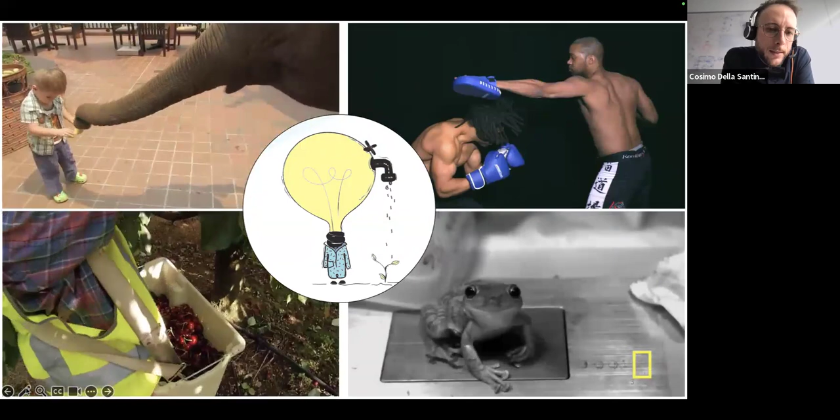But things change when we consider more complex situations, or more precisely, more different kinds of movements. In these cases, we find that animals still largely outperform robots in performing tasks, in performing motions. You can see here a few examples of that.

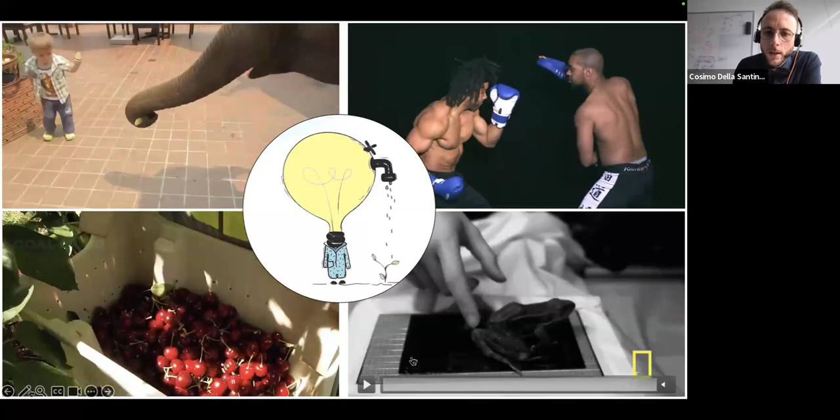Animals can perform movements that are inherently safe, that are simultaneously precise and compliant. They can be robust to external uncertainties and work in very complex tasks like this harvesting task, and they can generate peak performance far beyond the limits that our muscles would let us suspect.

So I want to build this talk upon what may be seen as a bold statement by some, or quite an established statement by others: that a large part of this motor intelligence is generated, or can be generated, by looking at the musculoskeletal dynamics—as produced by the body—rather than some explicit computation that goes on in the brain. Again, this is a bold statement for some of us, and at the same time it's maybe not super clear what this means.

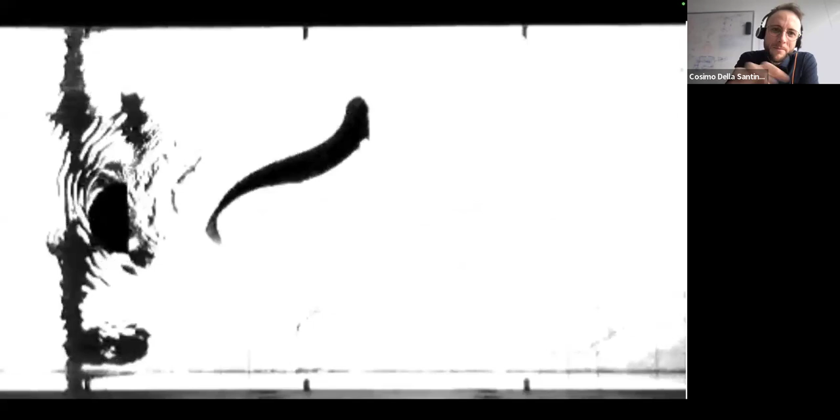So to make it a bit more clear, I have a nice video from research now almost 20 years old. Many of you may already have seen this, but if you have not, I urge you to look at it closely.

The first time that I saw this video, I saw a fish swimming in water, trying to do these very complex motions to stay more or less in the same position, sustaining this continuous, complex flow, because you have this object here creating all kinds of turbulence on this side.

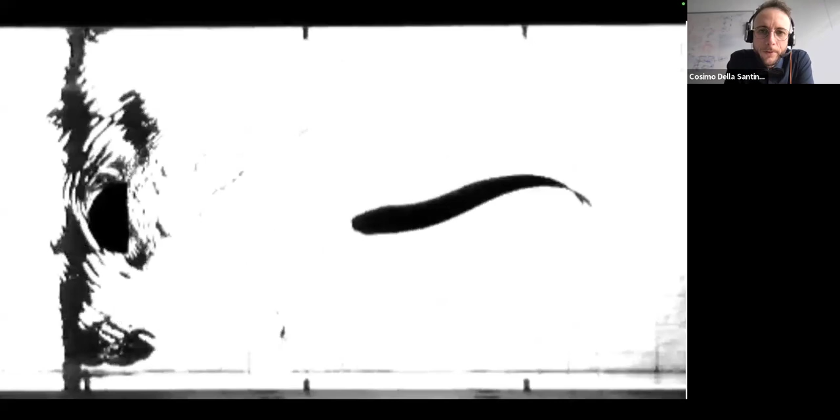After a while, at least I think you start seeing something a bit weird on this fish, but it still looks normal enough. And then only after you read the paper, you discover this is actually a dead fish.

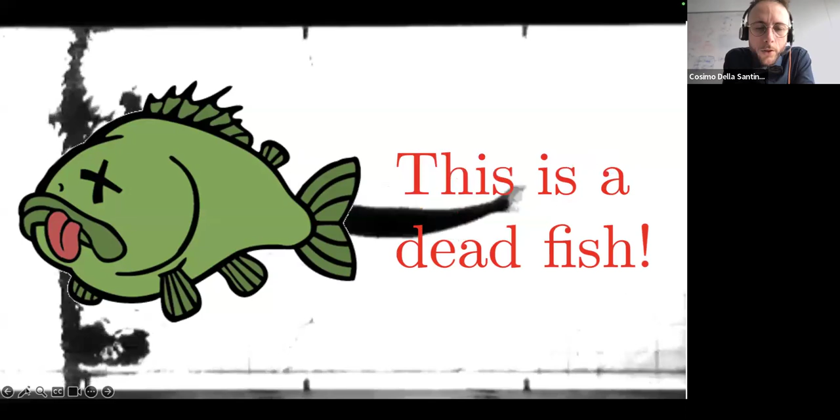And all these complex motions that you see here that allow the fish to stay where it is, more or less, which is what most fishes in rivers have to do for most of the day, is actually not generated by the brain or any computation in the brain of the fish, but it's just a passive property of the interplay between the mechanics of the fish and the fluid. There are many other examples in nature.

Let's start from the first. I think that these dead fish examples, as many others, bring us an important question for robotics, which is: can we build systems that are smart without a brain?

So another way to put it is, can we go from the dead fish in nature to some kind of zombie robot? And by zombie robot, I mean a robot that can move without computation, move intelligently. And in order to do so, I guess it makes sense, since natural bodies can do that, to try to replicate or rely on some of the ingredients we can find in nature.

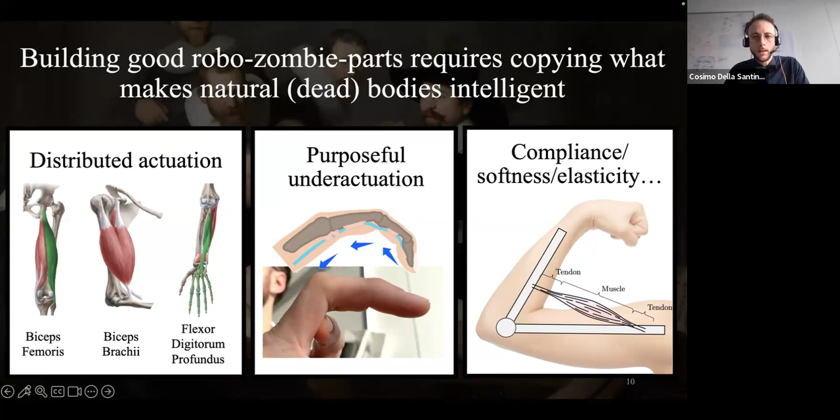Instead of going very much into detail on what all these three mean, let me show it with an example, so how you can transfer them into a system. And this is a work that we did, now, several years ago.

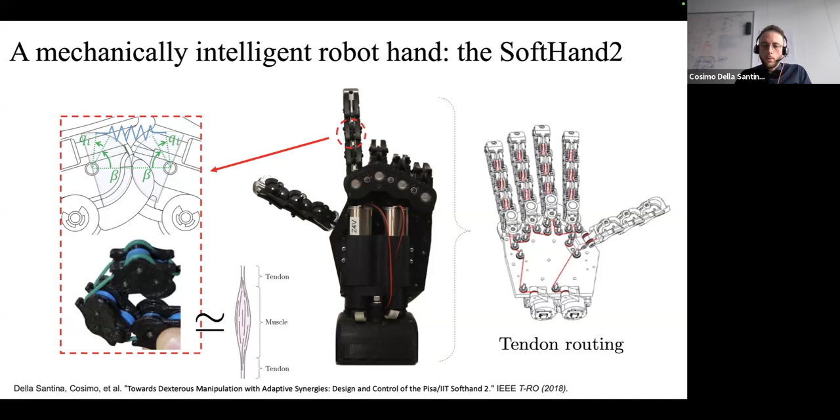And in order to decide which kind of movements should be generated by the motion of the motors, we performed a statistical characterization of human motions, and we translated the most common ways for the hand to close via some modeling of the mechanics. But what's important is that in the end we can tune the mechanical properties so that it could produce any linear combination of these movements.

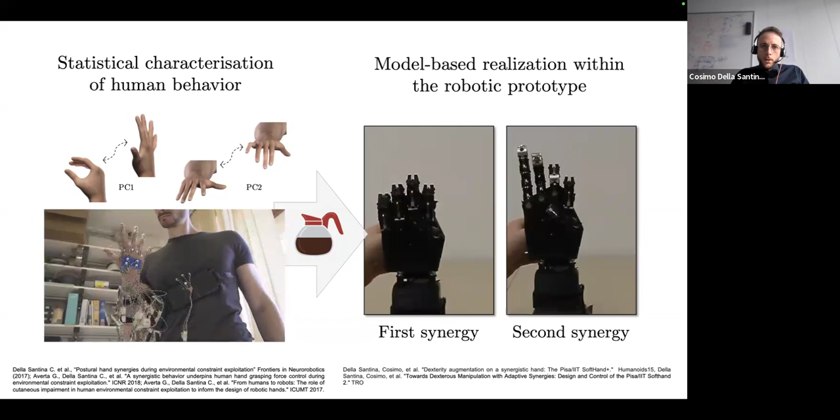So where the physical intelligence comes into play is when some interaction with the environment happens. And this very simple opening and closing behavior that you can see in the black box on the right ends up generating a very different final configuration, like something like this, or like something like this in the end, depending on the fact that you have an object and how the object is positioned. And these behaviors are completely an emergent property of the interaction between the hand and the object itself.

There is no sensor, no closed loop, at least no computational closed loop. It's all generated as a response of the same feed-forward action.

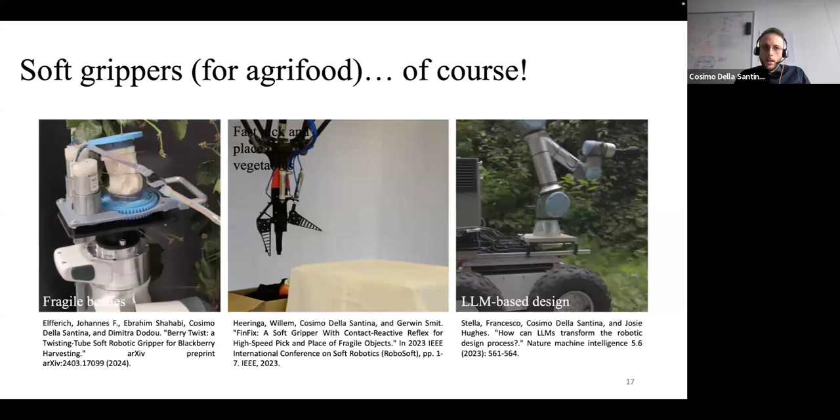And for people among you who know about soft grippers or under-actuated grippers, this is no surprise. Indeed, these are just three other examples of works that we have done a bit more recently in my group, and now we are looking more at applications in agriculture, and we are not the only ones—a lot of people are looking into that. But this idea of just doing a 0-1 input to a gripper, and then the mechanics of the gripper will take care of things, is something which is very popular. We definitely did not invent it with that hand.

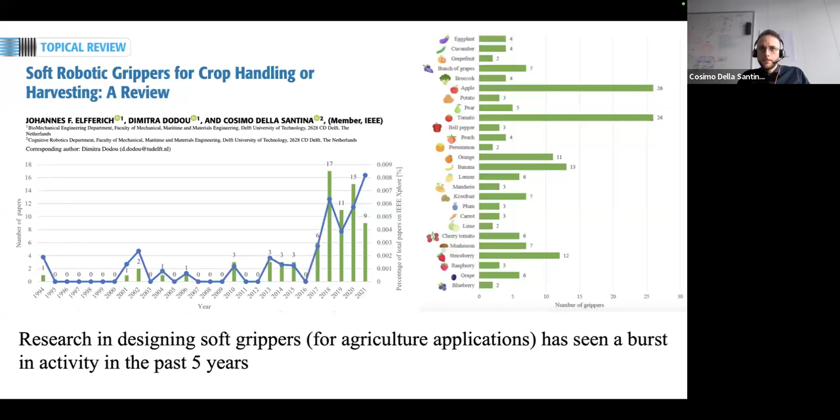But what I was personally struck about when performing this research was instead the capability of the same hand to perform brainless in-hand manipulation, again as a response of the same feed-forward action, which I will show in a second.

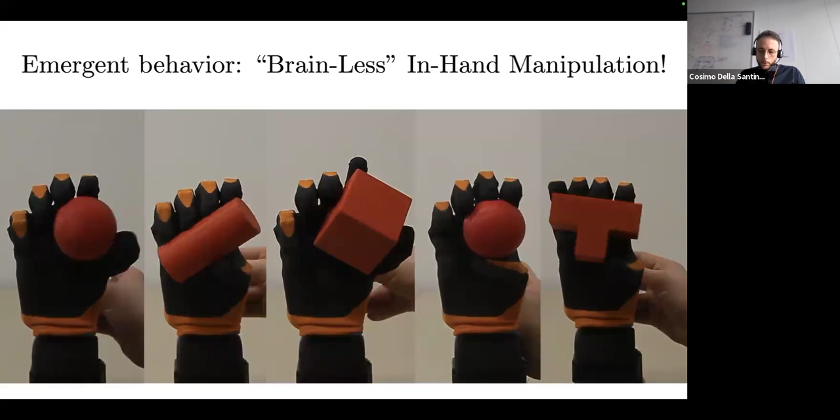And in all these cases, the input is the same, and then you get some very complex pattern of finger movements, and the object is rotated just as a reaction of the mechanics of the system.

And this, I would say, is some physical intelligence in play. A way to realize that is if you compare how you'd need to do the same task with a complex robotic hand, you'd end up having to do quite a lot of complex things, like in this very nice work where they use reinforcement learning with full knowledge of object posture and a lot of sensors. And this is the feed-forward input that we generate every time.

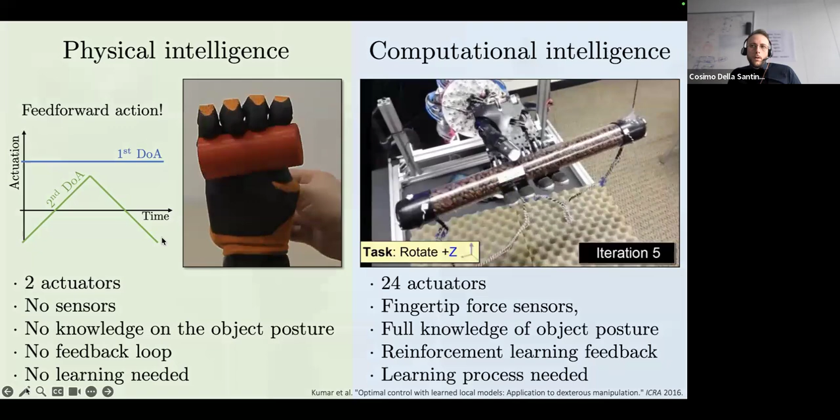At some point, we said, okay, hands are cool. We developed over the years several other kinds of mechanically intelligent hands able to do several things, some grippers, some of them I've shown. But why focus only on hands? What about more complex stuff?

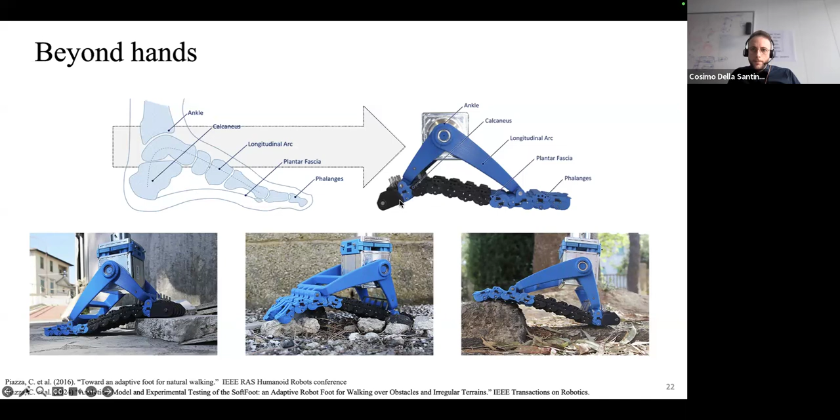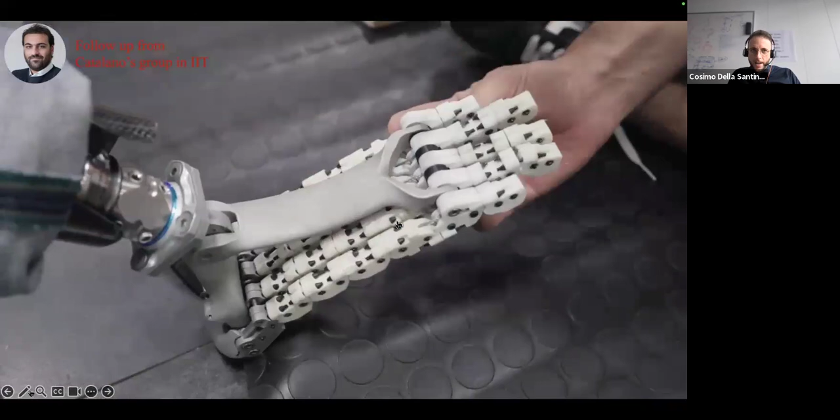And this is why we started to look into feet. I will not talk in detail about this robotic foot, but it's based on very similar ideas and similar technology. Instead I will show you a video from a follow-up research which I'm not involved in, but is so nice. I think it shows very much what this foot is capable of.

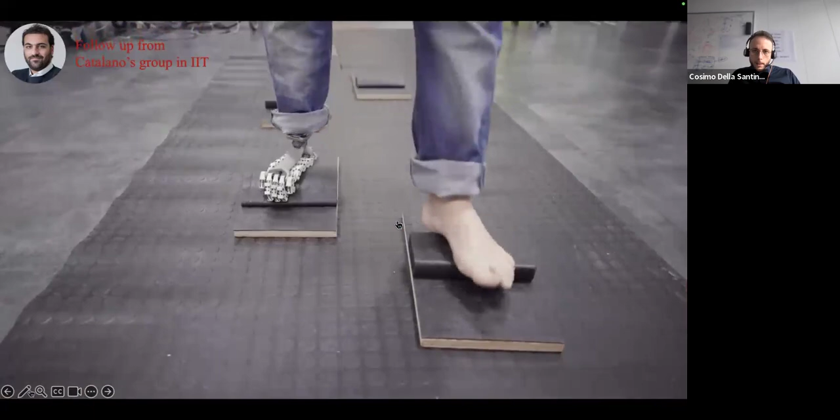So this is work of Manuel Catalano, who was also spearheading the research in the other work. What he did here is extend and basically transform the robotic foot into a prosthesis. But the principle again is the same.

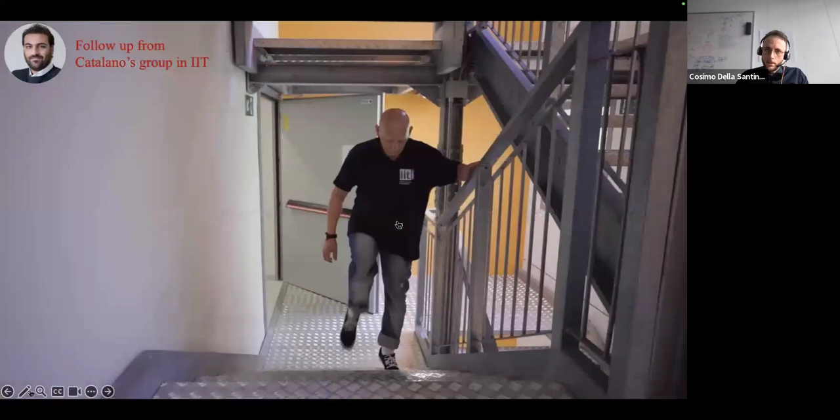So what you can see here are all these kinds of movements, especially the one you probably saw at the beginning, which are like grasping motions completely produced passively by the mechanics of the system. In our robotics papers, we have shown that this dramatically increases the region of stability on uneven terrain for an inverted pendulum compared to a flat foot. So completely by mechanical properties.

More recently, and this is really ongoing work, the paper is in press right now, we have thought of pushing this idea even a step further by building fully passive, fully mechanically intelligent bodies. Here we use similar ideas, this time taking data from dogs running.

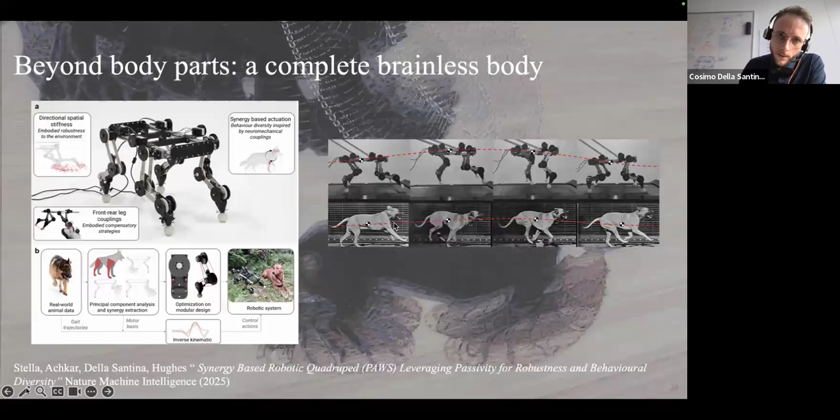You can see some snapshots of the data set here, and this is the system that came up. Again, let's look at a video which probably better shows these ideas that are going on.

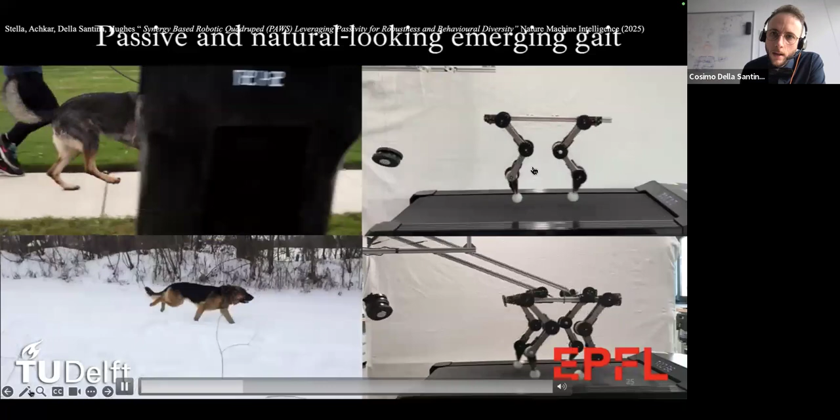So what you have here is a completely passive walker. In the paper we also show an actuated version of this, but what you have in this video is a completely passive walker, which has multiple degrees of freedom and can generate a variety of different patterns. For example, it can adapt by generating various limit cycles for different velocities.

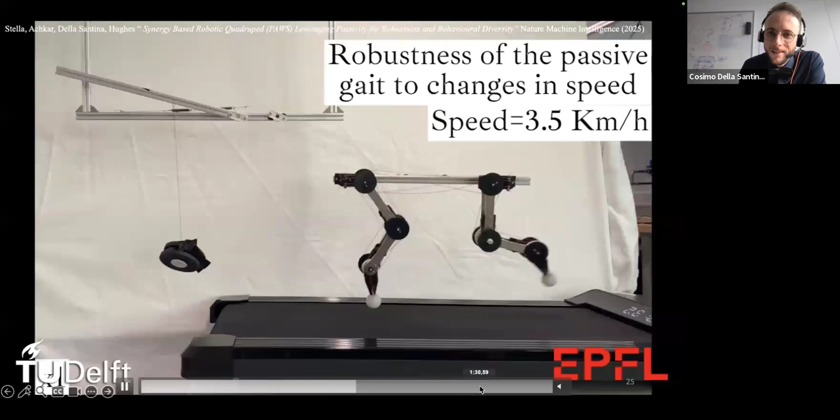So in a sense, we succeed. Many other people are also succeeding in doing this, in generating zombie body parts or zombie bodies, meaning a mechanical system that can already solve part of the motor intelligent tasks on a purely mechanical level.

And of course, I've shown this as if it were a result of some magic, but clearly it's not always fully understood. There are sort of control loops, or at least how I like to think about them, going on in these mechanical systems. They are just implemented mechanically instead of computationally, but this simplifies things a lot, and I believe it's quite worth pushing to keep building more and more intelligent mechanical systems.

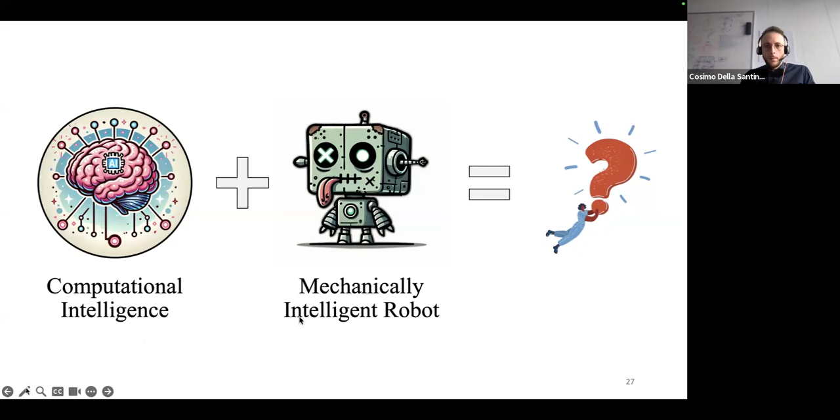However, now that you have a mechanically intelligent robot, you may ask yourself, how do I use it? Unless you work in prosthetics, as for example the video of the foot that you have seen, it doesn't make much sense to take this extreme stance of having no intelligence at all. Actually, the larger part of my group's research focuses on this topic: how you put back some computational intelligence into the mix, but without losing the mechanical intelligence of the robot.

This brings me to the second part of the talk. We do that in several contexts. Let me go back here, but mostly, and this is what I'm going to show today, in grasping, in locomotion, and in continuum soft robots, like soft manipulators.

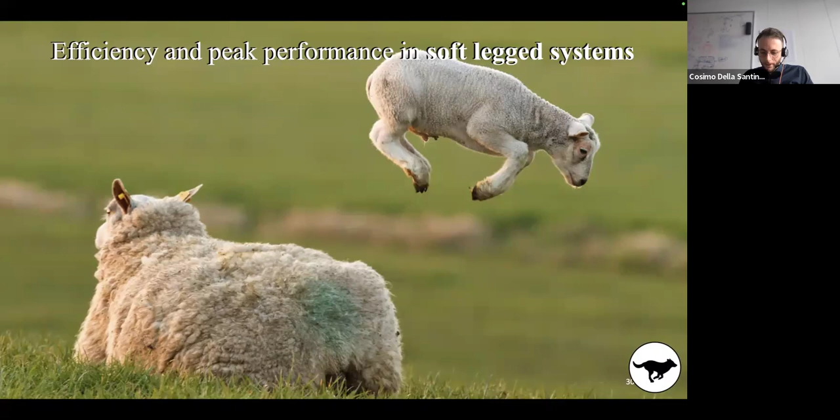With quadrupeds, we look into elastic, or soft, or articulated soft quadrupeds, and we look at periodic locomotion, meaning steady state behaviors. What we want to do here is to exploit elasticity. So here you have tendons and springs hidden into the mechanics of these systems. You want to exploit them in order to generate this super efficient locomotion pattern that allows the robots to walk for a very long time, spending a very reduced amount of energy.

For example, here we have this quadruped that we developed at DLR. It hides into its mechanics springs, and we are able to exploit these springs to walk for several hours on this treadmill in a completely semi-passive way. But this time we have motors, so we can control the behavior. We conceptualize this periodic locomotion challenge as exciting, by means of feedback control loops, nonlinear oscillations, or families of nonlinear oscillations that are embedded in or generated by the multi-body dynamics of this system, or this interplay of this multi-body dynamics with elasticity, with potential forces.

We are also looking at explosive jumps, and I think this is probably the topic most directly related here, because we look at either model-based or model-free optimization. The goal is to generate explosive jumps similar to the frog at the beginning of the talk, by finding ways of injecting energy into the springs and then releasing it all together.

This is a Go 1 robot from Unitree, but we end up opening it up and modifying all kinds of mechanical parts, and also adding some on top, so to have parallel elastic elements in parallel to all joints. So we can store energy in these parallel elastic elements and then release it in order to perform these jumps. But of course, it's quite complex with so many degrees of freedom.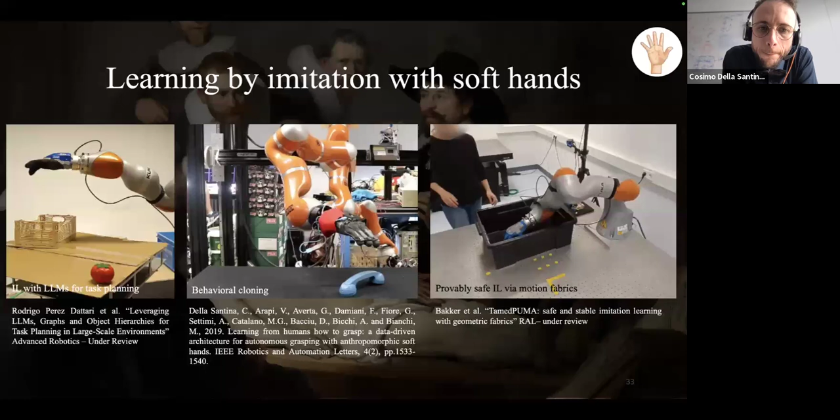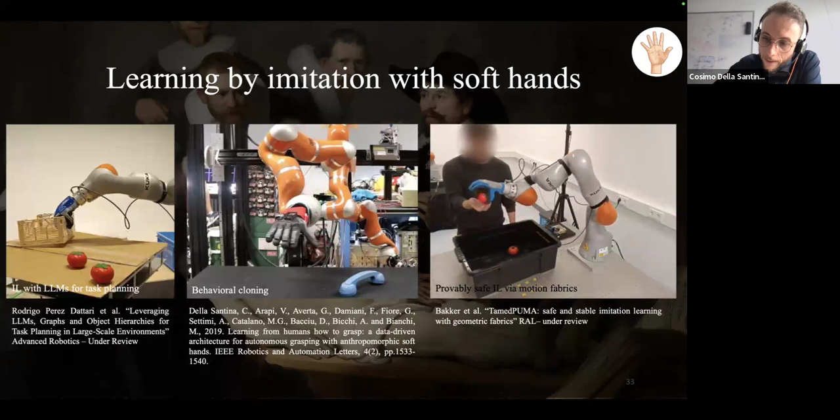The second topic which we focus on, but I will present only briefly with this slide, is to understand how we can use mechanical intelligence, robotic hands, to do grasping and even manipulation. Most of our work here focuses on learning from humans, using AI, especially imitation learning, to copy human behavior and perform these intelligent motions. The focus here is often to do that from very small datasets, even for just one single demonstration, for example. This is made possible by a combination of innovation on the imitation learning side, but also the intelligence that is already embedded in the mechanics.

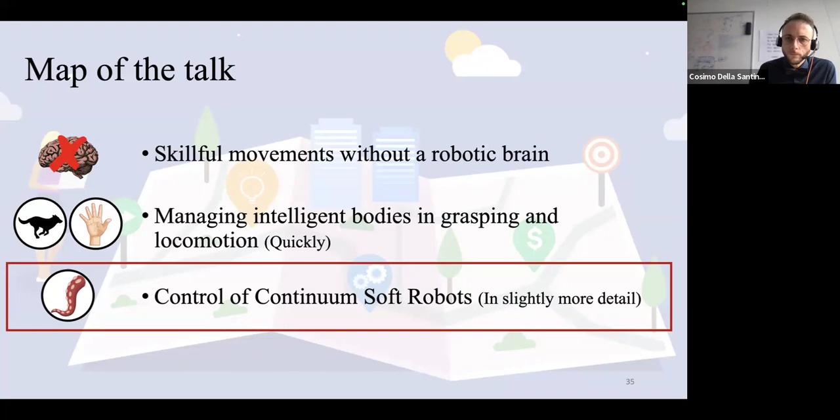Let's move to the third part of the talk, which is on control of continuum soft robots. And with this, I will present in slightly more detail what we mean with continuum soft robots. The term soft robot itself is, I think, a super poorly defined one, and that's why I like to talk about unconventional robots more generally. But the way which I like to define it is any kind of robot where you are embedding purposefully designed compliant elements into the structure.

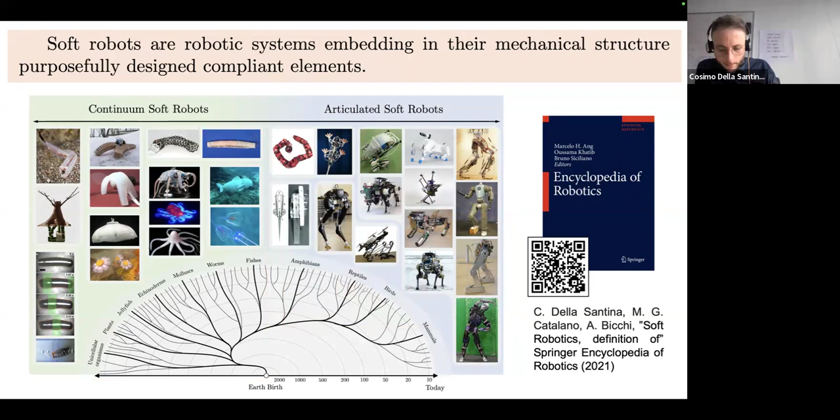So not just continuum soft robots, but also some of the robots that I've shown before. Any kind of robot that follows the third ingredient, the natural ingredient, the fact that in animals we have softness and elasticity. But continuum soft robots are nowadays what most people refer to if you just talk about soft robotics without any adjective before. These are inspired by invertebrate animals like an octopus, and they have this very complex structure. Plenty of work has been done in the past decades, but especially the past 15 years there has been a revival and an explosion of interest in this kind of system.

You can see some of them here. So you have all kinds of robotic platforms around. We developed some ourselves, but what actually interests us the most is to think about how you generate intelligence with these systems, and for how extreme and new the systems are.

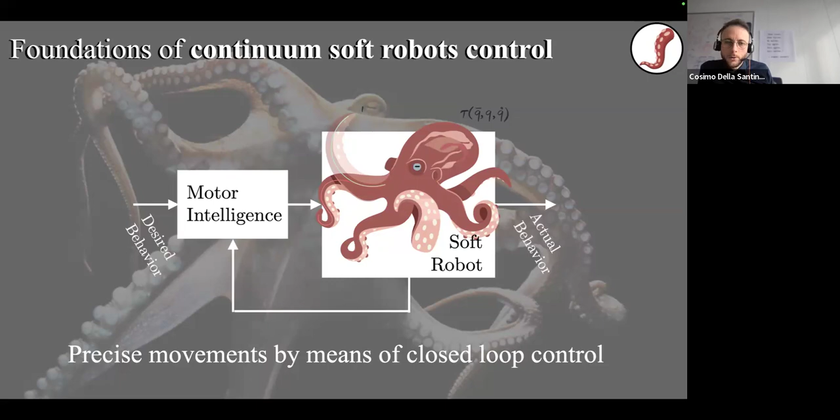In this case, with my group we follow, for a good part, a very traditional and established way to look at it, which is to try to express this challenge as a nonlinear control problem. So we try to see if we can define and then solve the very classic challenges that you have in classic robotics, solved already for many years, most of them, but in this new context.

Answer questions like: can this shape evolution even be generated with available actuators? The answer is most of the time no, but you can get maybe some evolution which is close to the one that you desire. And if yes, or at least if you have an evolution which is attainable, how do you generate such evolution in a robust way?

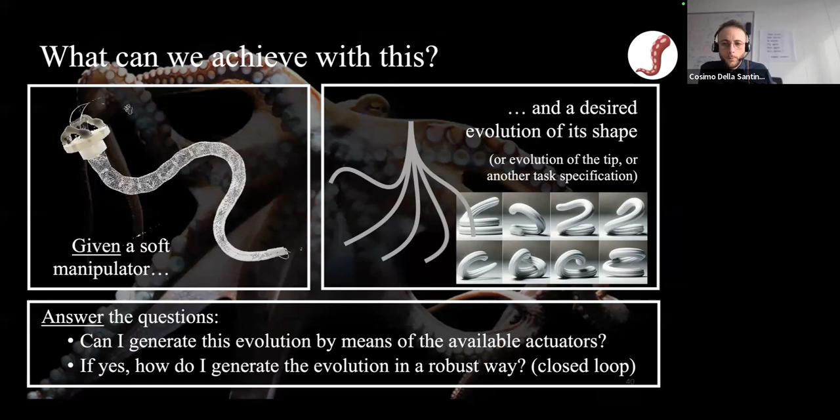By closed loop. And most of the controllers that we aim at developing have this kind of structure. So it's kind of a collocated PID plus model-based compensation.

I personally like very much as simple as possible controllers that are very easy to interpret, and they can be coded in a few lines in theory. So PID, I think most of us know what it is, and compensation and cancellation, especially of potential forces, you can kind of guess.

This is a block scheme of how this looks like, and why I'm presenting this is because in soft robots, to explain it properly I would need probably a couple of hours to go through it. But again, I'm happy to discuss in a bit more detail if you're interested.

Soft robots are heavily underactuated mechanical systems. So we have to, I mean, you can either go two ways: you just simplify a lot their dynamics, and we have done this in the past, and you just neglect the passive part, the underactuation. Or, if you want really to understand what is going on and really build a robust and effective controller, you have to embrace this underactuation.

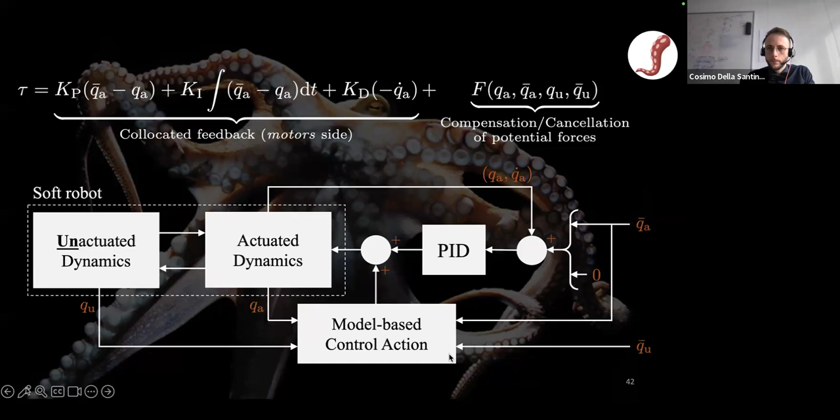So you have a closed loop, for example, with a PID on the actuated dynamics. And then you have some compensation, which instead is a function of the whole state. Understanding and defining these things properly took some work, which I'm not going to present here.

It's below the surface of the water, the iceberg. I will instead show, in the style of the rest of the presentation, what is above water. So some experiments, some resulting results that, however, come up after really starting from trying to establish this theoretical foundation, defining this new algorithm, and then finally we have some experiments to show.

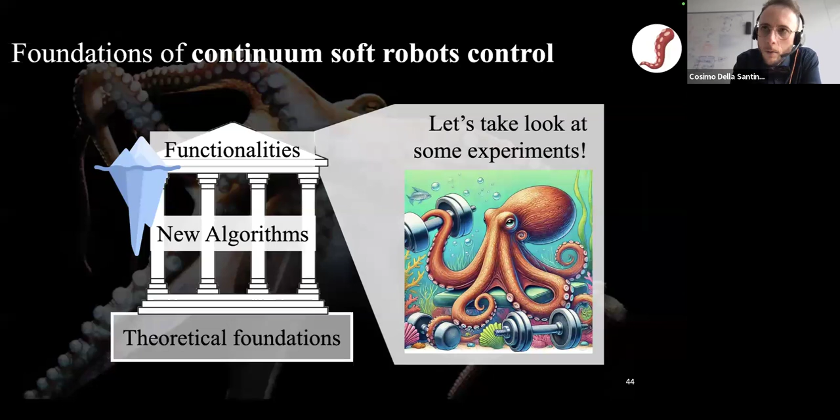But before going to the experiments, I'm going to do some, let's call it, self promotion. So I put online recently this preprint.

In it I look at the challenge of closed loop inverse kinematics for structure-like continuum soft robots, but actually also for underactuated grippers, humanoid robots, and other things where you have a lot of passive degrees of freedom—how you can deal with this challenge. For soft robots, this ends up defining the desired shape of the robot to then feed to these low-level controllers that I'm discussing in this presentation.

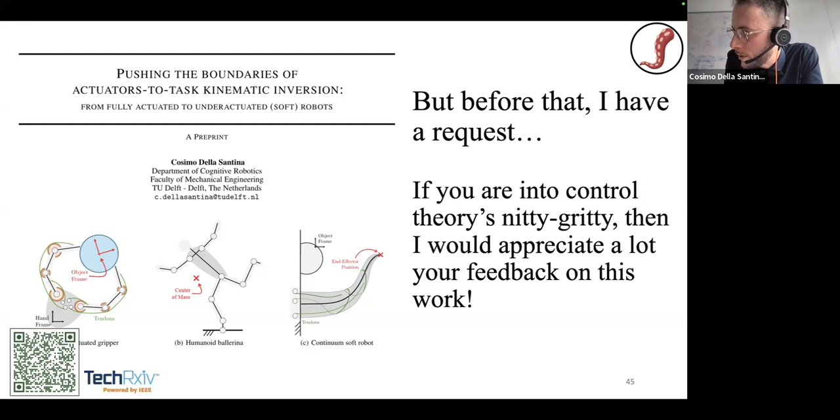I'm showing this slide because this is a huge topic that has been studied in a simplified setting in soft robotics for many years. People in soft robotics came up with this cool idea of actuators-to-task kinematic inversion, and I tried in this preprint to generalize that. You realize this is actually applicable to all kinds of systems, and I cannot think that something similar has not been done in other fields. So I'm asking for inputs from people outside soft robotics control, maybe you can point me to interesting references and work that have addressed a similar challenge in these other fields.

So the promised videos. What you have here is a metamaterial based soft robot. It's kind of a weird start for soft robotic validation, but this is a very nice system. It was developed within Daniela Rus's group, for example. Jeffrey Lipton and Ryan Truby and many others worked on this system, and we have been working on the control of this robot.

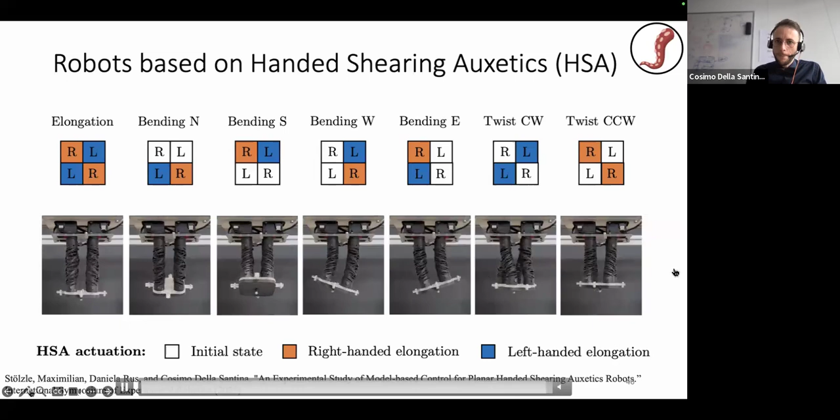You have motors on the base here, and if you move this motor, you are applying some twist to these elements. Since this is based on a metamaterial that extends when twisted, you can pair four of them so that you can get all kinds of weird motion and configuration. But then the challenge is how you close a loop on this motor to nicely generate these motions. And yeah, this is a scary block scheme that does something very similar to what I showed in the block scheme before.

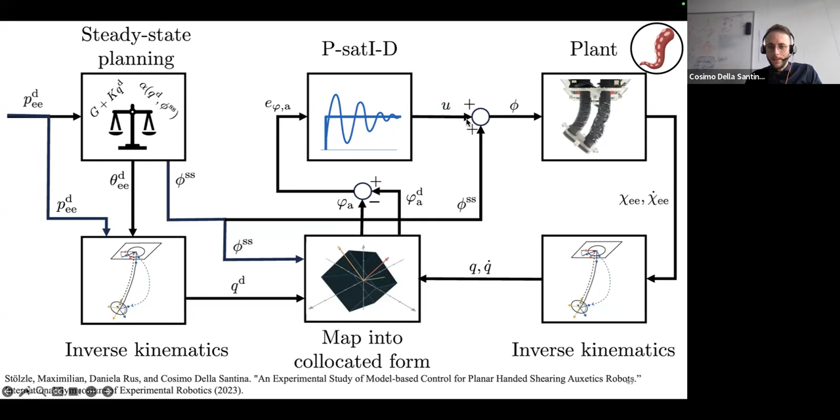You have your soft robot, you have some inverse kinematics, but this inverse kinematics really goes from sensors to state. So this is for sensing, while this other inverse kinematics is for control. You have to somehow take into account the underactuated parts, and we do it here. Then we map with this nice decoupled form, which is called collocated form, and then we do basically a PID plus compensation in this setting.

The experimental setup looks something like this. When we do control work with soft robots, we like to rely on reliable sources of information. So we use a motion capture system, but of course there are also many ways to do this proprioceptively. This is what you see here: markers, and this is the robot I showed before.

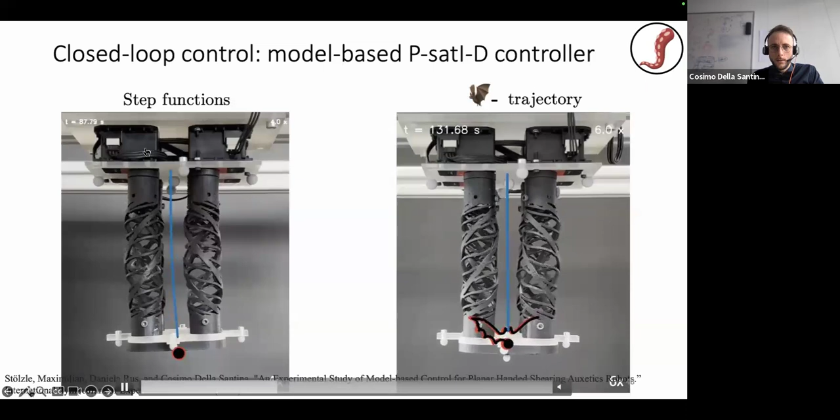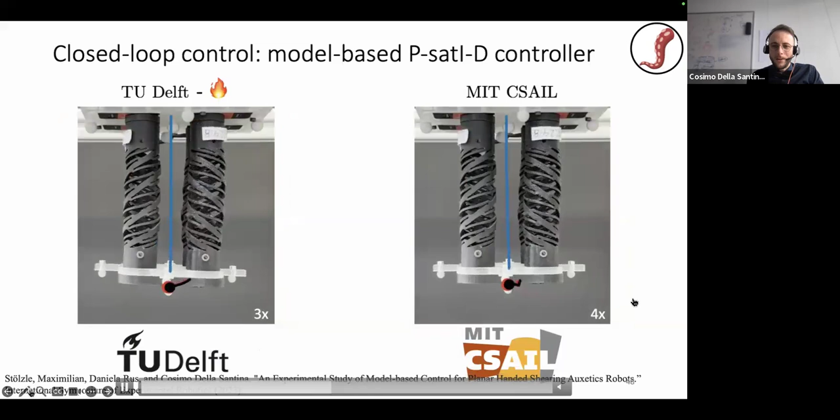These are the kinds of behaviors that you can obtain. It's a relatively sped up video, but I think it shows decently well what is going on. We want to position the tip of this robot somewhere, and we just follow with closed loop. We are able to do that by rotating this base, and you can do nice stuff like nicely drawing the Batman symbol, but also other symbols. You have TU Delft and MIT, which are the two institutions that were part of this collaboration.

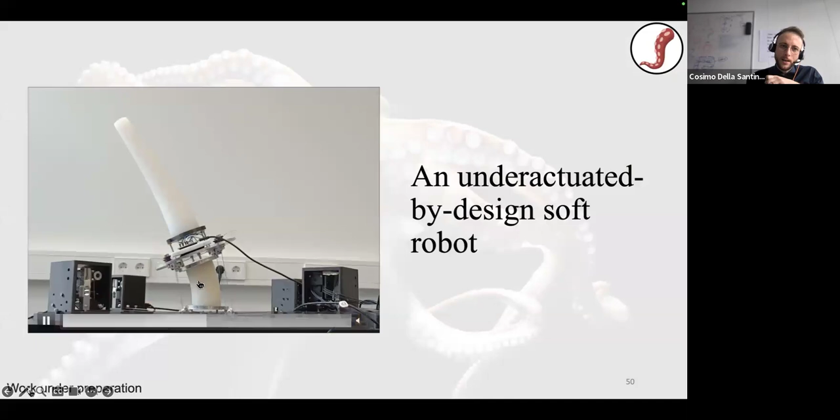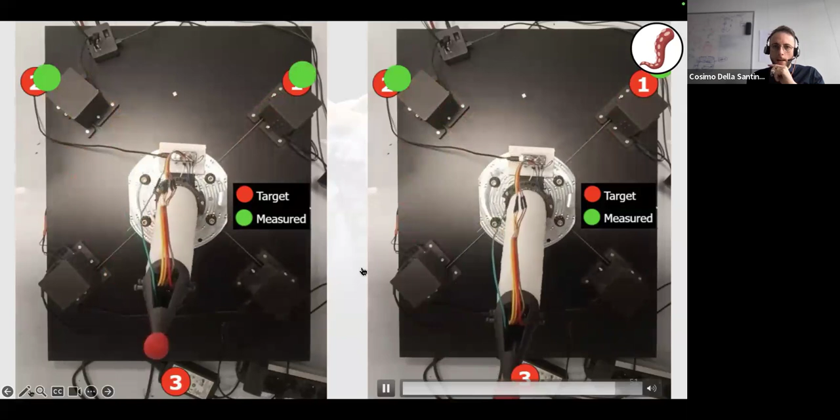This is another soft robot that we developed to be explicitly underactuated. It's very clear that this part is passive and this part is actuated via tendons. It's interesting to try to do things like positioning the tip despite this passive element. Now we are working on closing non-collocated loops as well, that allow us to reduce oscillations in the tip.

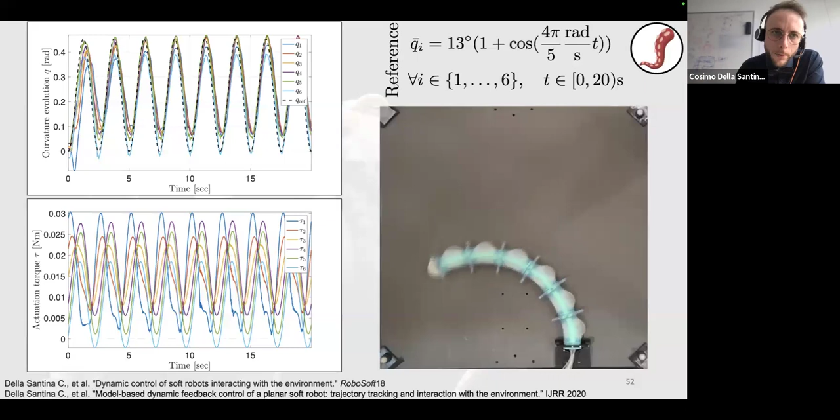Then you can try to perform trajectory tracking of a shape, as we are doing here. These are other shapes. What's nice about this experiment, which I always show, is that you have these two variables connected with the position and configuration of the base part. This is a very soft robot.

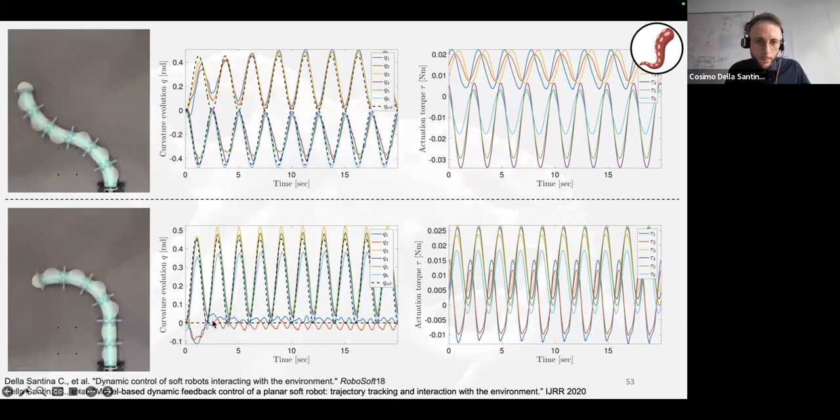If you oscillate on the tip, what you'll get is a lot of dynamic coupling with the base. So what you try to do here is keep the base still, not moving, while withstanding the oscillation on the tip. You see these balloons bulging with the same frequency as the tip, and this dynamic coupling is being compensated by the model-based controller in order to keep these things still.

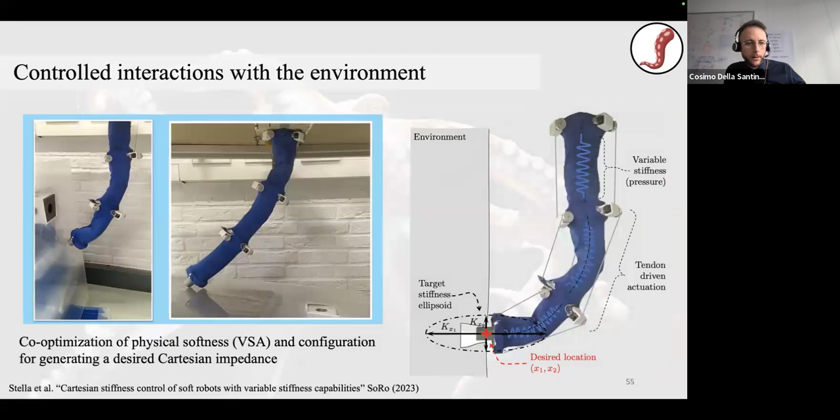You can do Cartesian impedance control to trace a trajectory, and you can even do stuff like co-optimizing. Let me skip this one.

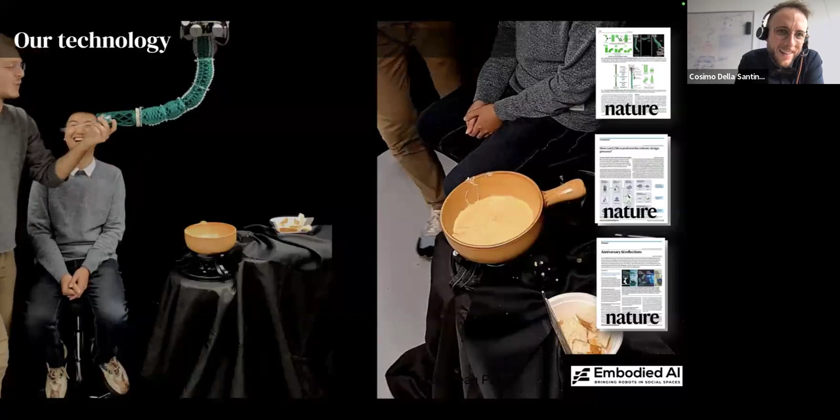This is another nice example of doing closed loop control with such a manipulator. This is a tendon-driven soft robot, and you can do closed loop control here to simultaneously have precise positioning of the tip while maintaining compliance.

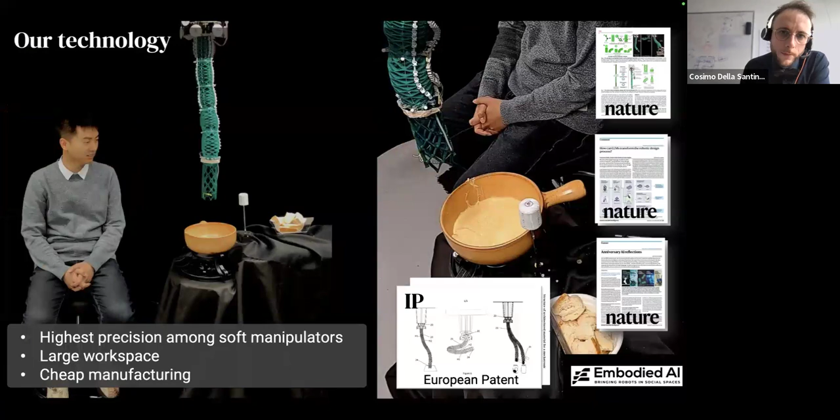This robot has now been the focus of a spin-off company that my former PhD student Francesco Stella is pushing forward. There's a collaboration with Josie Hughes at EPFL, and the company is based in Switzerland. If you want to know more, this is our website behind this QR code.

Francesco is pushing this forward. Going back to academic research, and looking at the clock, I realized I don't have time to show everything I wanted, so I will skip a few slides.

Something we've been very interested in recently is thinking about what you can do in moving from this situation, which is the one I described so far: you have a soft robot, you extract some mathematical model as a prior, and then you deploy this mathematical model in some closed loop controller of the form I've shown before, with some nonlinear but closed form structure. And then that's it.

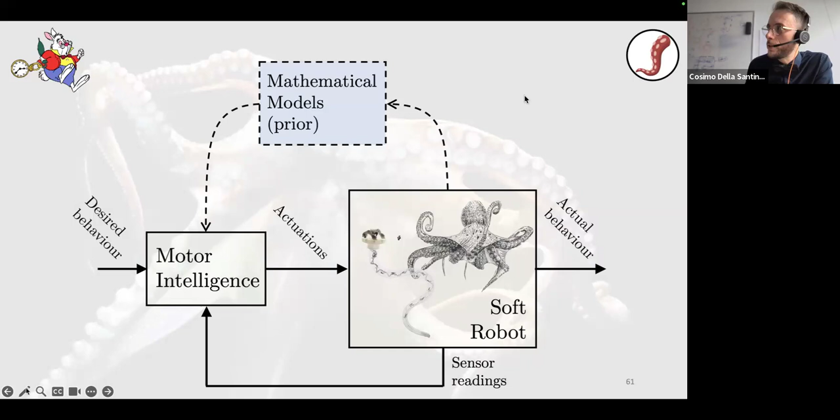From this situation where the mathematical model is developed by an expert engineer, to a situation where this part is automatized, and the model is extracted by means of learning methods.

Of course, given the specific structure of the controllers we use, it's not possible to just put in any kind of learning strategy, as you could, for example, do if you were using model predictive control or even model-based reinforcement learning.

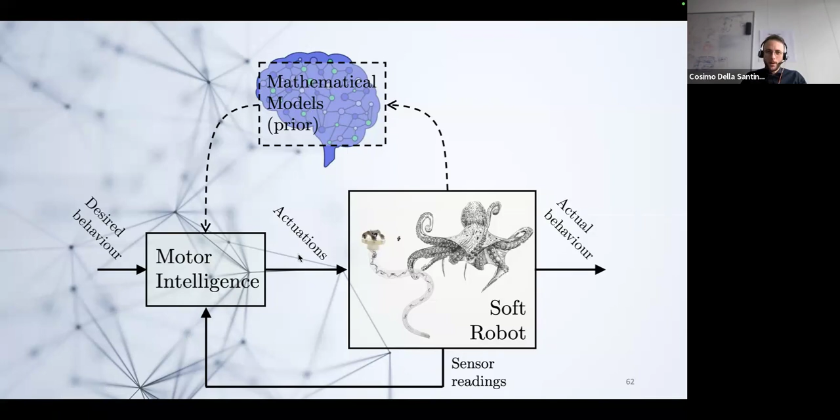But you need your model to end up with a structure compatible with the theories we developed before, so I have the physical structure that our closed form controller expects. This is why we look at physics-informed learning to learn physics-coherent dynamics.

In a nutshell, what you want to do is take your mechanical system, collect a dataset, and then by supervision, end up learning the mass matrix, Coriolis terms, potential terms, dissipation, and input matrix.

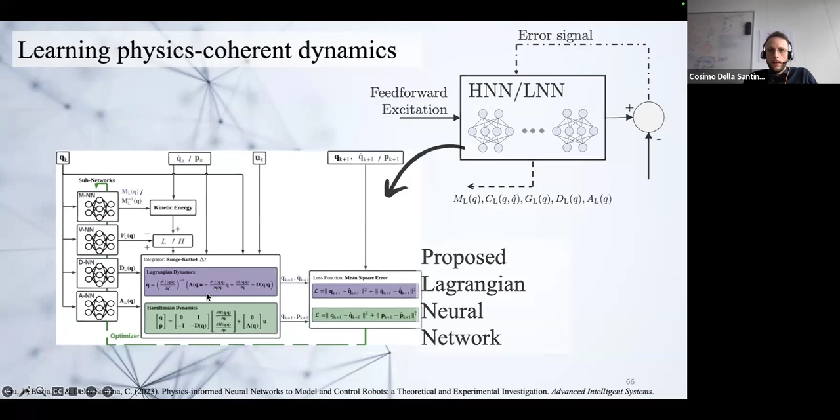And yeah, you end up having this thing that is formally the same as the first-principles model systems that we have shown before. We skip this, and then you can deploy this learned model into a provably stable model-based controller.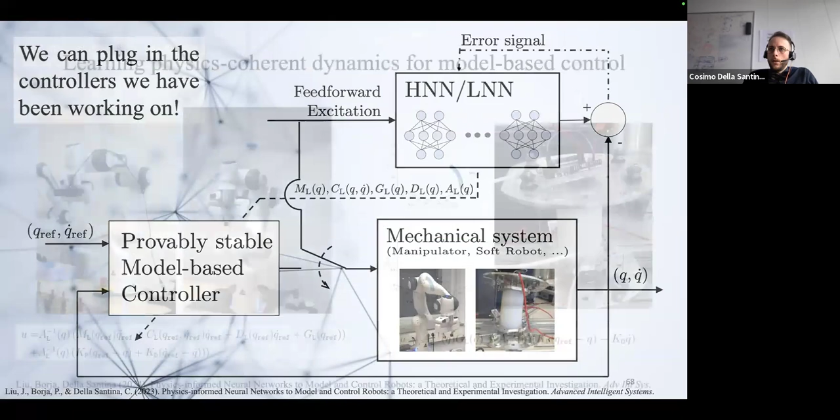These allow us to do things like closed loop control of both standard and soft robots. As you can see from these videos, we can get performance which is at the same level as the off-the-shelf controller that you have in the Franka manipulator.

But completely from data, without any tuning. What the control theorist or the control engineer inside me is more happy about is the fact that you can really give guarantees based on the model-based structure of the problem, based on if the learning is good enough within these boundaries, then you can get this kind of performance, using arguments based on robust nonlinear control.

There are some twists with respect to what you will need to do with classic control, but this is fine. So I don't have time to go through, let me just skip all these very nice things. I'm happy to discuss maybe next time that we meet.

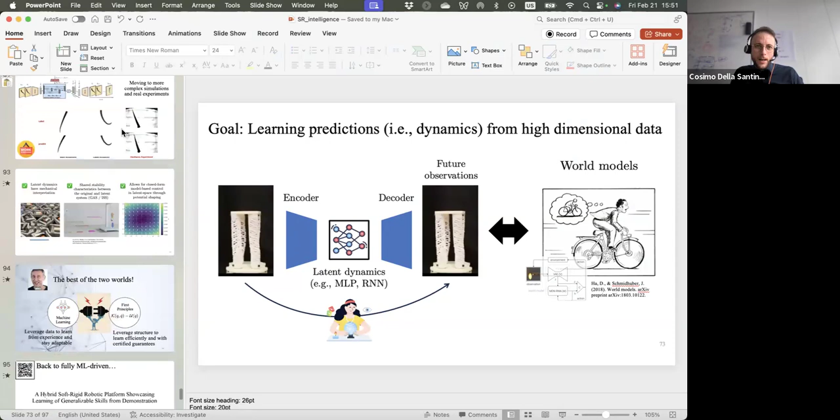But they are all going in the direction of really pushing this idea forward and trying to learn directly from even more abstract data, like for example input outputs from videos, using physically consistent learning strategies.

And in summary, I like very much this possibility of combining learning with first principles, because you kind of get the best of the two worlds. You leverage data to learn from experience and stay adaptable, but also you leverage the structure to learn efficiently and with certified guarantees.

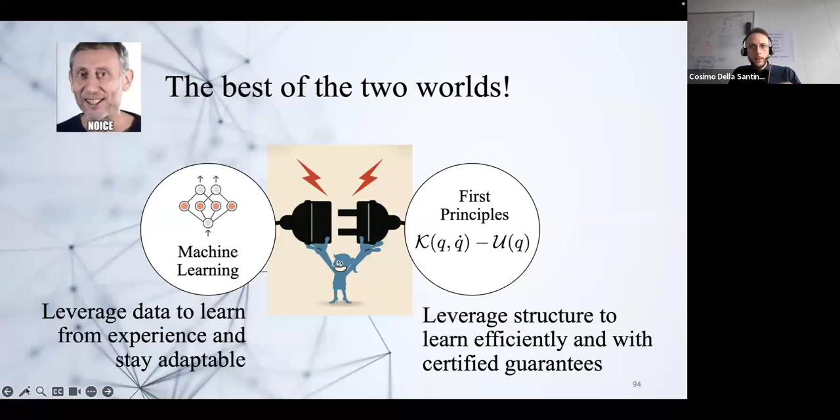And now I have my very last slide, which kind of goes back actually to fully machine learning driven stuff, more into the domain of the things that I've shown before for grasping, or for some of the things connected to locomotion. This is an ongoing work which we have put again as a preprint online, but this is still research that we are doing.

What you're seeing here starts from the thought, or the fact, that within my group there are people that like to work with rigid robots. I've not shown much about it, but there are people that like to work with continuum soft robots, and people that like to work on AI.

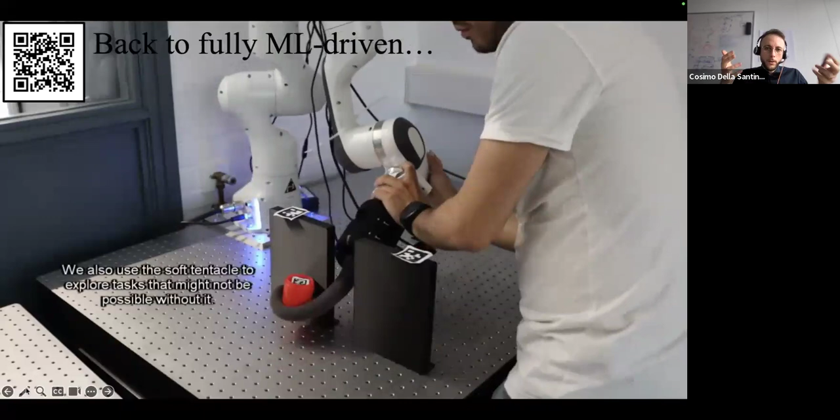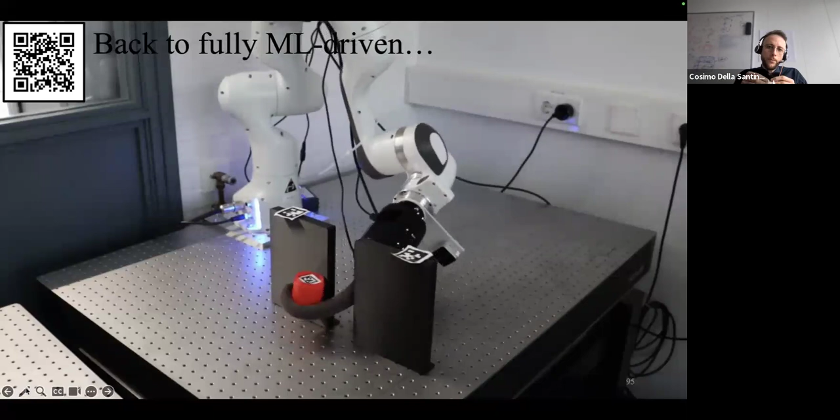And we thought, is there some way to get the best of these three worlds? The precision of rigid robots, the embodied intelligence that I started from in this presentation of continuum soft robots, and the capability of adapting to complex logic situations that you will have from AI and learning from data.

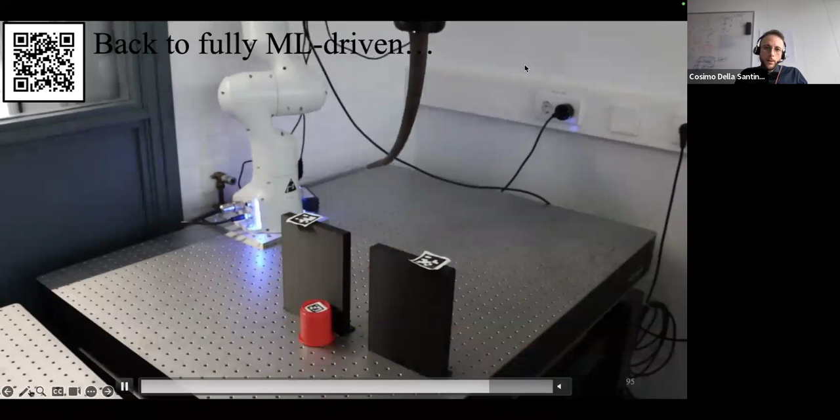So what you see here is a result of that. Just from a single demonstration that is shown to the robot, it's able to, of course, replay the same task, but also to generalize to different task situations.

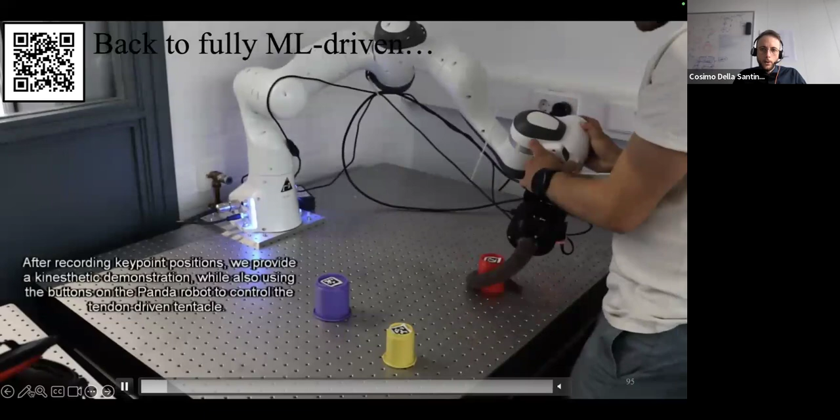What you don't see here is a bit more experiments that we have done now, showing more vast generalizability, not just across a task, but even more interesting, across different kinds of objects that you play with, or different environments you play with, so that you can really exploit both the embodied intelligence and the computational intelligence.

So this is all from my side. Thank you very much for sticking until the end, and I'm open to any question you may have.

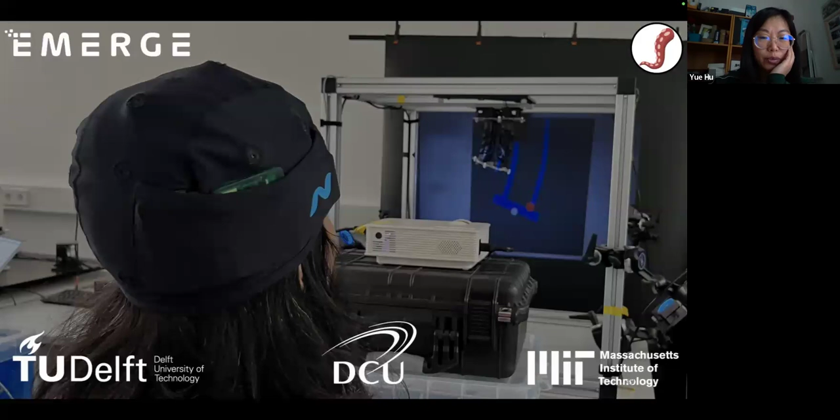Okay, then maybe in the meantime I have another question, more specific, about one of the works you showed—sorry, I forgot how it's called—the one where you were drawing the symbols of TU Delft and MIT, with the BCI interface later controlling that. This is purely a curiosity question: in the video I could see a light projection on the back end. I was wondering what is the purpose of that?

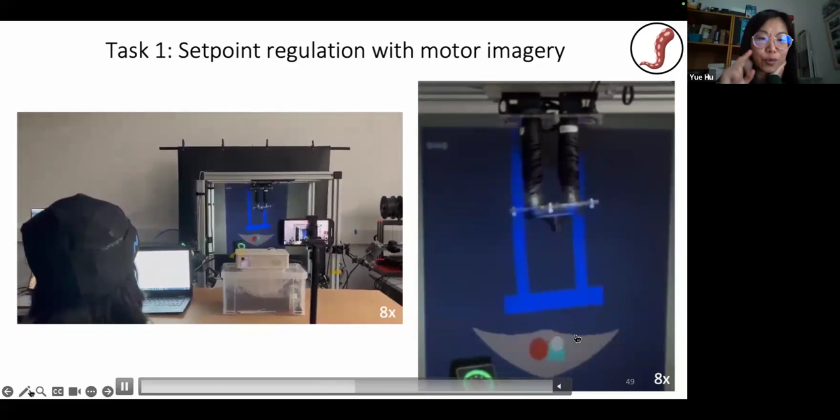Yes, this is a quite weird thing we had to do, but it was in order to try to decouple the issues the subject may have understanding the desired position of the tip from the problem itself. So this is just a fancy way of showing the subject that the tip of the robot should go here, at the red point, and this blue thing is just a representation of where the robot is, and the white dot is where the tip is at the current time. It's just a trick to visualize nicely—many times in this kind of experiment you just show something on a screen, but Maxi and Sonal, who spearheaded this work, had the nice idea of showing it overlaid on the real robot.

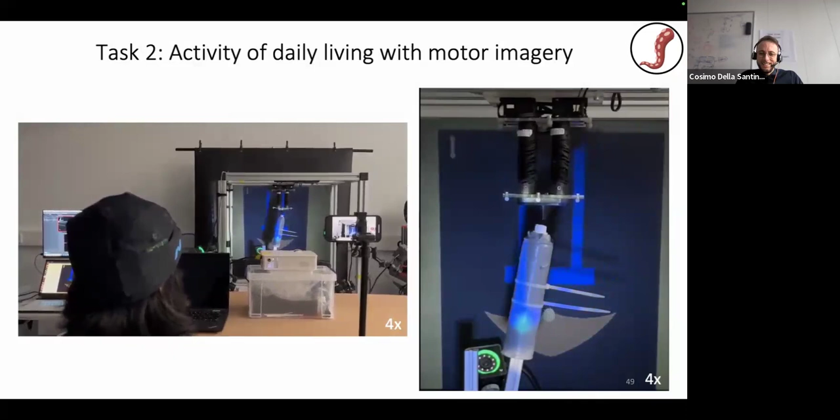I was wondering—I thought maybe it was mainly for them to visualize it better, but I wasn't sure if it had a secondary purpose. No, this was indeed the goal. You can see the projector here.